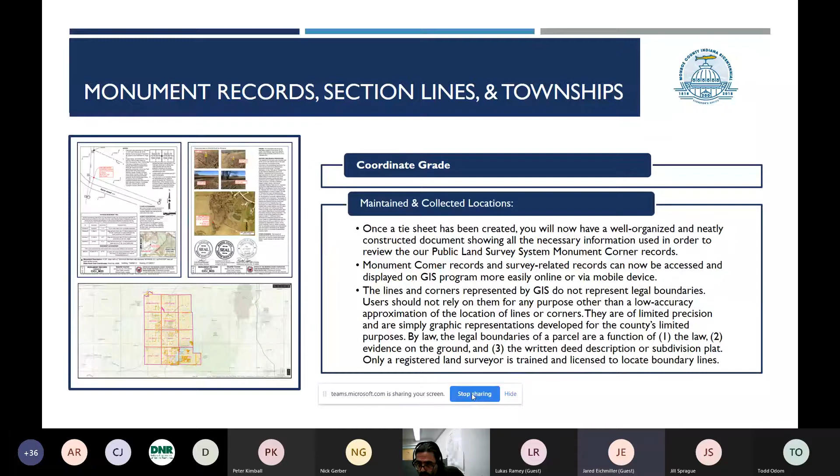Okay, when we begin this process, it starts with an email from planning. This is set up from OpenGov, an electronic permitting software system a lot of counties use. They alert us that a preliminary plat is being recorded. We go to the OpenGov page, and there are qualifications and agencies involved in this project.

Here's our review. We go to the attachments and download the plat. It kind of looks like this. We download it onto our machine.

Oh no. Sorry, I'm on the wrong screen. Let me shift over there. Okay, now we can see my G drive, I hope, where I download this document. Thanks, guys.

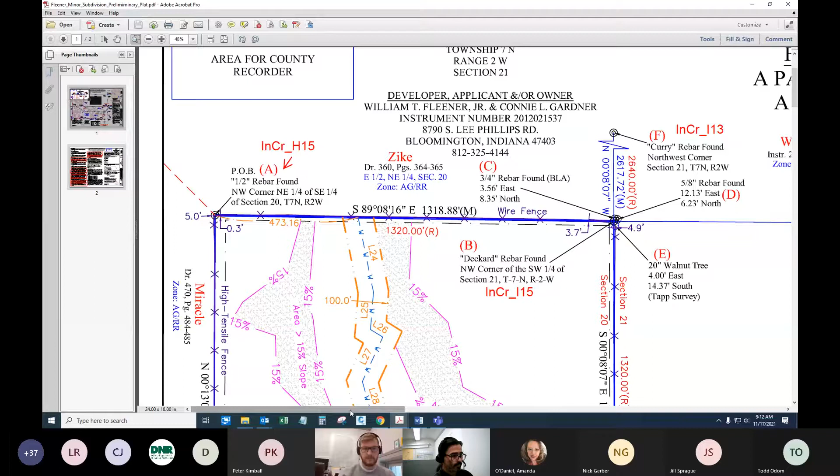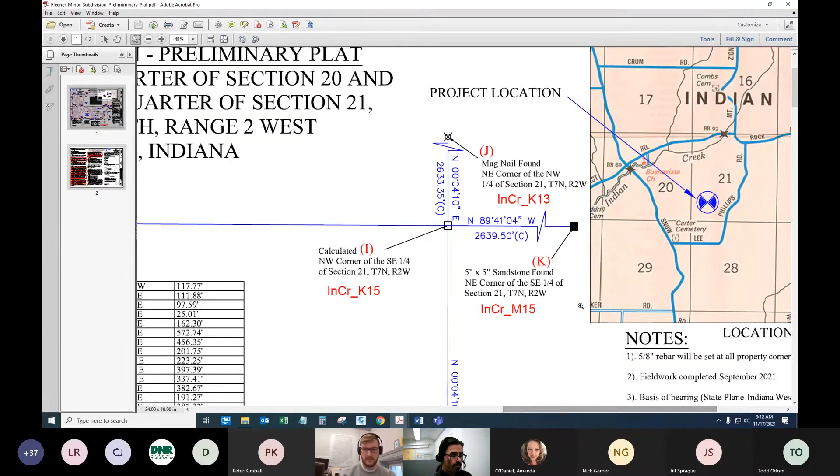If it's a stone, we make sure it's a stone in our records. If there's an inconsistency, we flag it. Here are some we're going to look at later. This is a good looking plat.

So another part of our process is to fill out a checklist. Now it looks like this. It has some basic information: the survey company, the planner, the name, the planning ID number, the name of the plat, when it came into our office, and when we approved it.

There were some simple questions. This one was consistent with all our records. If there's a discrepancy -- say the surveyor found a railroad spike instead of a piece of rebar at a corner -- we check that as a discrepancy and write it up down here. Or if it's just a replat of an existing subdivision with no section corner monument information, we just check non-applicable, save this, and upload it to the planning department. Our part of the OpenGov process is over.

However, we are going to continue to archive this stuff in our geodatabases, and Jared will speak more about that. So whenever we look at this form, this is where GIS starts to take us to the next step. It's a different way of thinking.

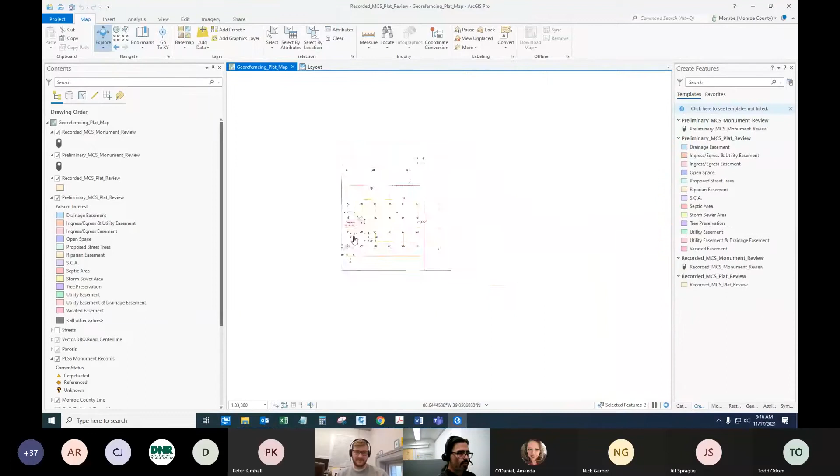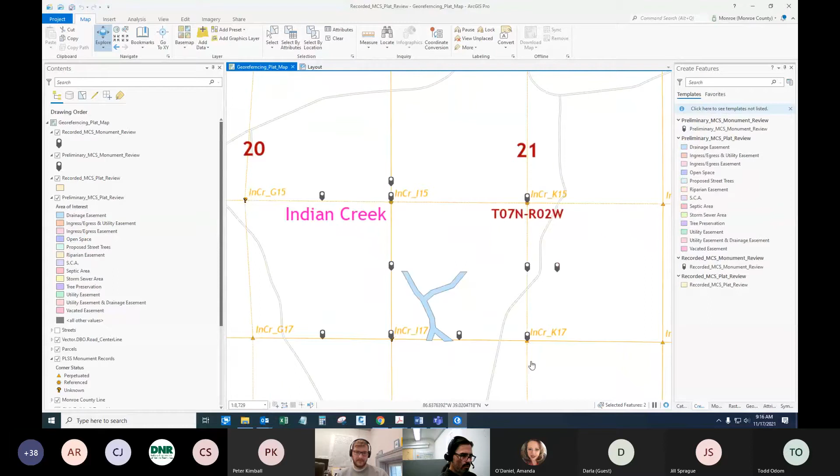See, I'm not quite there. Okay, so I kind of prepped this one. This is our county. We've got all these townships here, some little township nublins on the top and the side. This plat is going to be in Indian Creek, so I zoomed into the area since I'm familiar with it.

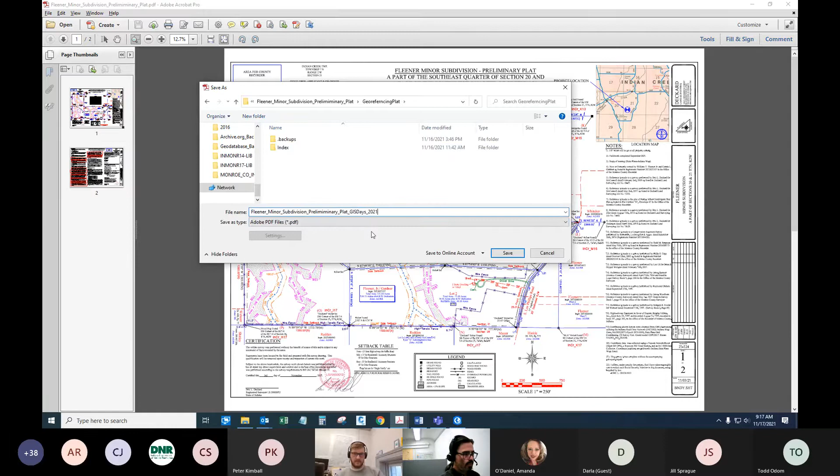I'm going to go to our folder. This is a preliminary plat. In order for this to be georeferenced, we can't do it as a PDF, so we're going to save this down as a TIFF in the georeferencing folder, with a new name with the GIS days tag on it, and change that to a TIFF.

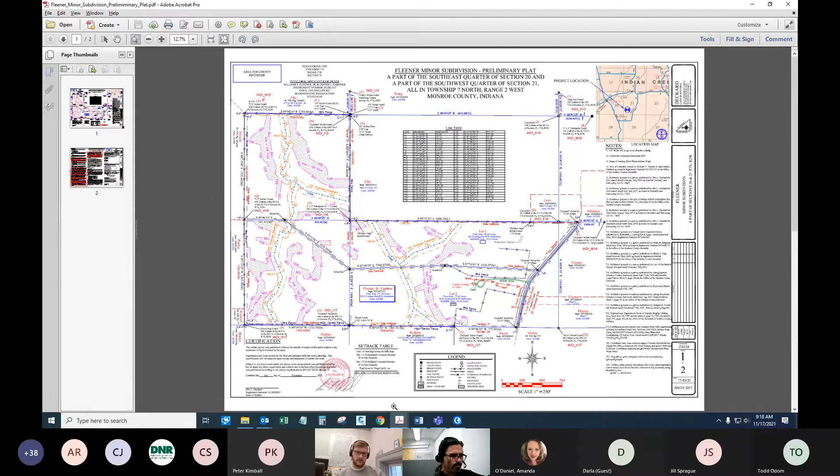TIFFs are nice, high quality, but you still have a lot of flexibility with them. A tip is it's nice to have color in there, because if you georeference something that's just black and white, it looks really weird.

This one copied the second page of the plat as well, but we only really need the drawing section, so I'm going to delete that. Rename that - like Jared spoke of, it's important for all these files to have the same naming conventions so they can all be pathed consistently. Okay, so we got a TIFF there.

We're going to go back to our software and bring this in. A lot of people just drag in these TIFFs from their Windows folder, but a lot of the GIS experts I've worked with have said it's best to bring it in from your catalog. I haven't really gotten a great explanation why, but I do it because of these superstitions I've developed over time - I just bring it in from my catalog, knock on my desk 3 times, and it usually works.

Find our folder here. There's our GIS days. Okay, and then we bring it in. I like to put it underneath the parcels layer. Over here you can see all the layers we're gonna explore.

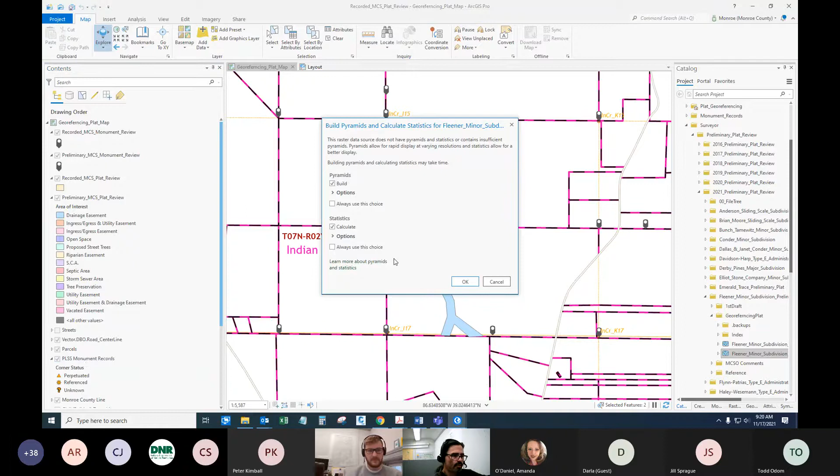It's digesting it right now. It's gonna ask me if I want to build a pyramid. And you do, but you don't want to hit always, because you don't want to get locked into that. Again, that was expert GIS advice, and I'm figuring it out.

Okay, so that means our TIFF is right there. There should be a little box here - it says unknown coordinate system because we have not referenced this yet spatially. We go to appearance, and we want to set the stretch type to none. For whatever reason, if you don't do that, it just shows up as a blank square.

Okay, then we go to imagery, georeference. You want to fit this to display. Oh, it worked. Great.

Okay, now we're going to add some control points. These lock this plat in. You can start to see the shape of it versus the parcels, and... Pepto-Bismol magenta. There's our plat in blue. These surveyors use lots of color - I like that.

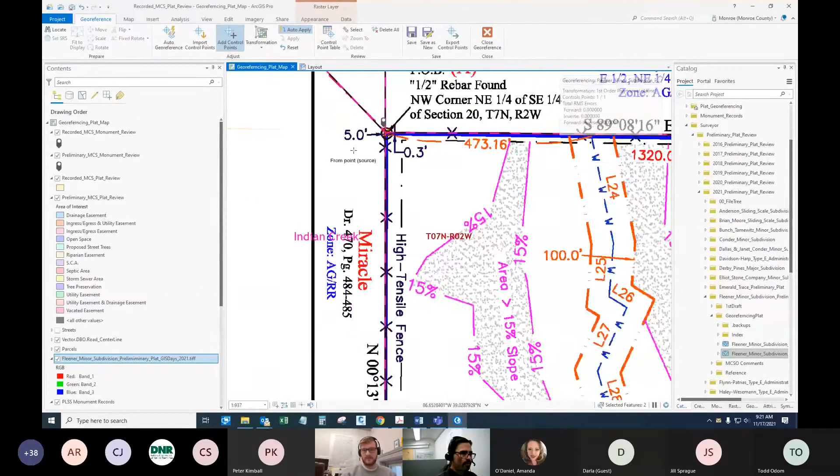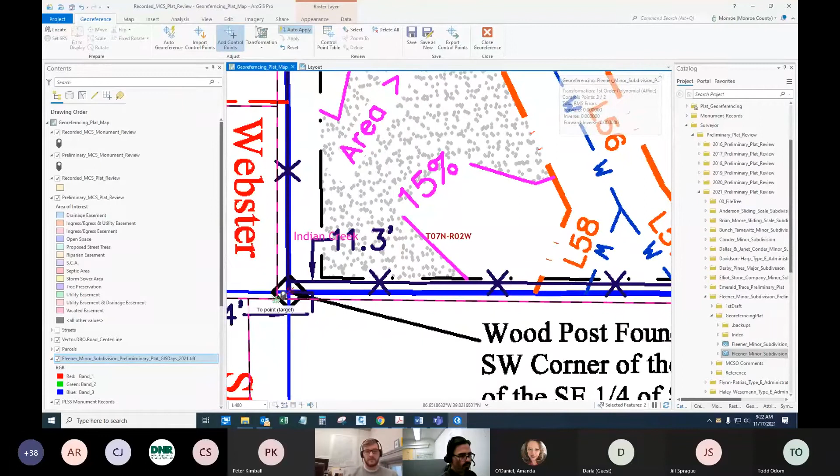So you just click on it and you see that little red circle - you create your first control point. You just go around and lock it into the thing, and it kind of shifts it around. Like we said in the intro, none of this stuff is survey grade. Once we put it in there and start stretching things, it becomes compromised and loses its scaling. But it's a representation of what's going on in this area, and that's an important issue to our planning department. We're going to start sharing this information more with them and other agencies as we go along and get this further developed.

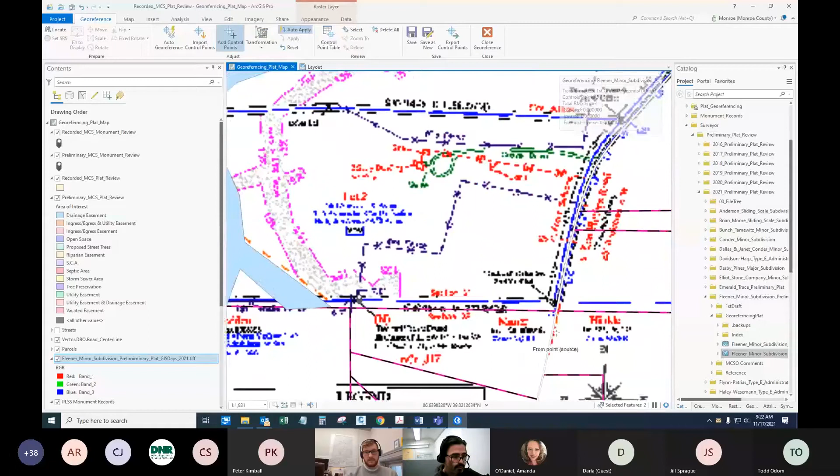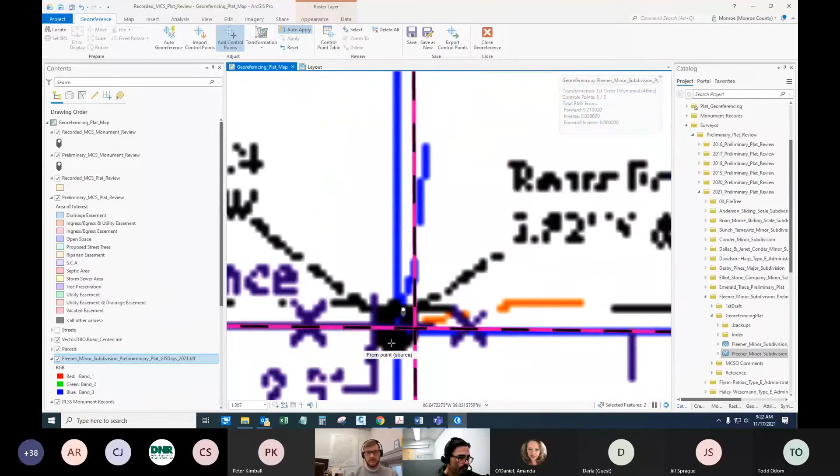Like in a lot of counties where these parcels have been around for generations, they're not perfectly shaped, and really the survey is probably a better representation of what these parcels should look like. They may get modified in time. So you just lock it in - you really don't need to go overboard. If you do it too much, it kind of really makes it oblong.

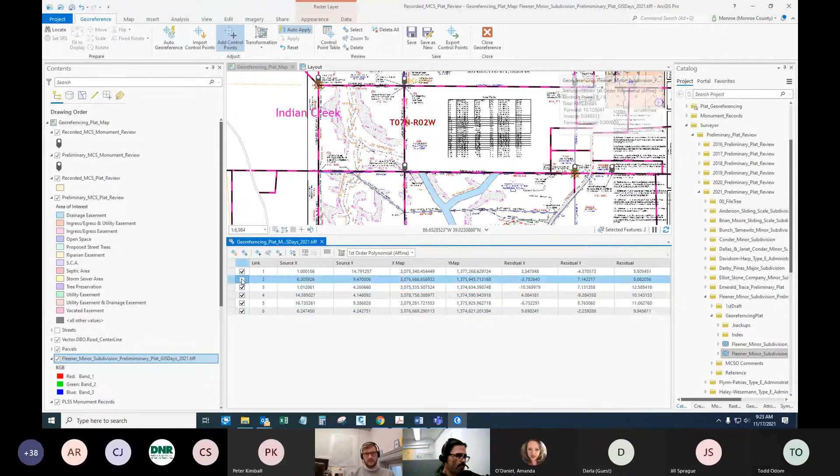Okay, so we got some control points there. If you want to look at your control point table, you can delete a point you don't like that shifted things in a way you don't think it should have gone. You can review that, delete a line - it's pretty handy. But once you've got things where you like them, you just save your georeferencing, and this TIFF is locked in here. And you close your georeference.

Okay, so next item we're going to demo here is we're going to show - this plat had 13 section corners on it, so I did most of them already, so as not to drag it on. These are two I left for the demo: a mag nail found at this northeast corner.

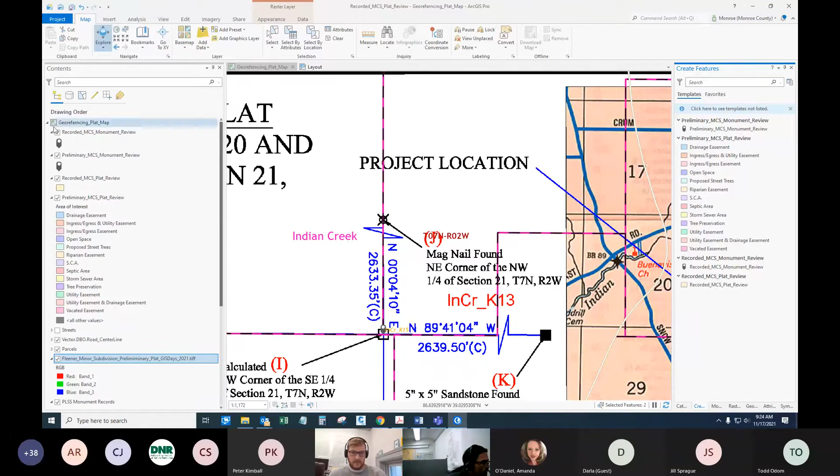So we developed this system to track these monuments. Got a little file tab here. You may know there's a break line here, right here. So this isn't actually where this section corner should go, but the important part is the data that we're going to use to identify this corner in our geodatabases. There'll be several instances of it as time goes on and more plats are generated in surveys, so we can check for consistency of all references to this section corner, Indian Creek K13.

Okay, so I've got the monument in place. I'm going to open the attribute table now, where we can see - there's other ways to do this as well. This is kind of my learning curve way of learning how to fill these tables. Where are we at? Monument.

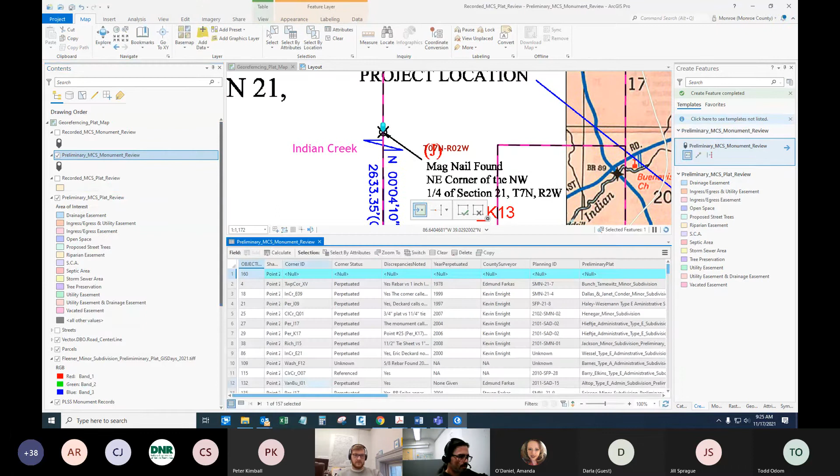That black box is the attribute table. I like to dock these up here so I can switch from map view to attribute. I sort ascending because this will be the last one in here. Go down to the bottom. What do we call it? Indian Creek K13. And we begin filling out our table.

If anybody sees a typo, just tell me.

So we check whether the monument is perpetuated or not, if it is referenced in surveys, or if it is unknown. This one is perpetuated, so we put that in here. There are no discrepancies.

I happened to research all this stuff ahead of time. This was perpetuated in 2011 by the then surveyor, Mr. Kevin Enright. These are the other fields I filled out before, so I'm just going to copy this information in from them. In time, we're working on ways to append this so we can just fill these fields automatically once we have the general planning number. But we just started this project as soon as I got here, so it's in its infancy right now. That was - the survey said that was a mag nail.

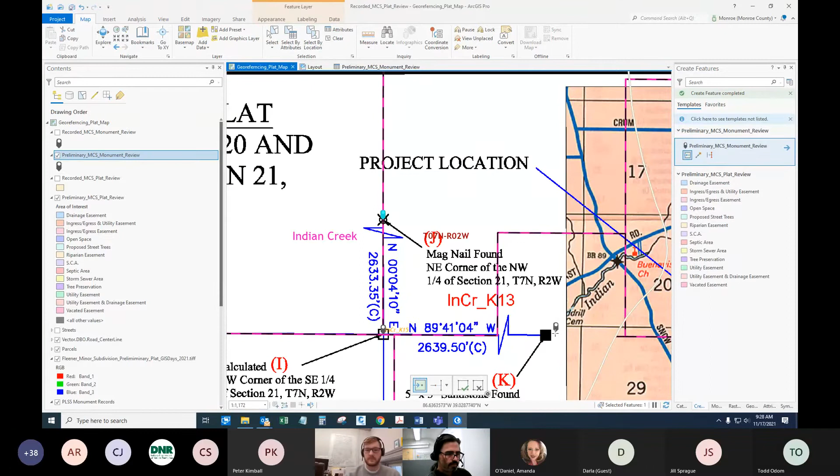Okay, we're gonna go right to our area of interest. And that's what we call these features here. These are things that planning is interested in: drainage easements, ingress, egress, open spaces, conservatory features. Stormwater is a big issue here. So a lot of these things were coming into play and probably become more into play as planning becomes more developed.

Okay, so I've identified a drainage easement up here. The best way to draw this out is with the polygon tool. You just kind of draw along there. I was terrible at this, but now it's pretty fun and something I look forward to doing.

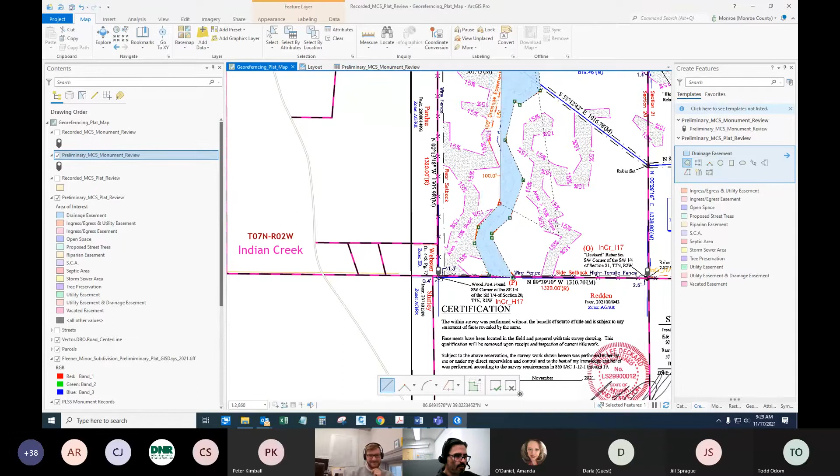It's like a reprieve to childhood days where you're coloring in school or something, like waiting before the teacher's ready to get going for the daily lessons. It doesn't have to be perfect because, you know, this water's not really going to go exactly along this pathway either.

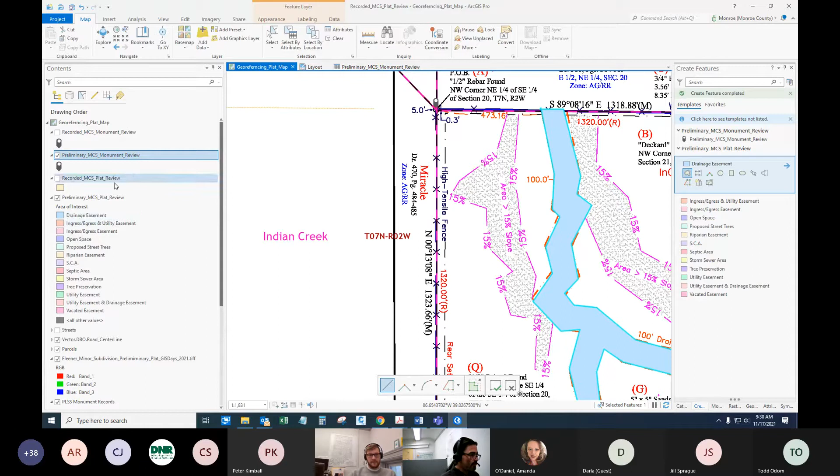So once you get it finished, you could just right click and hit finish, or hit F2. And that should load it into the attribute table for that feature. There it is, null. So we just filled our table. So drainage easement, that was already pre-identified.

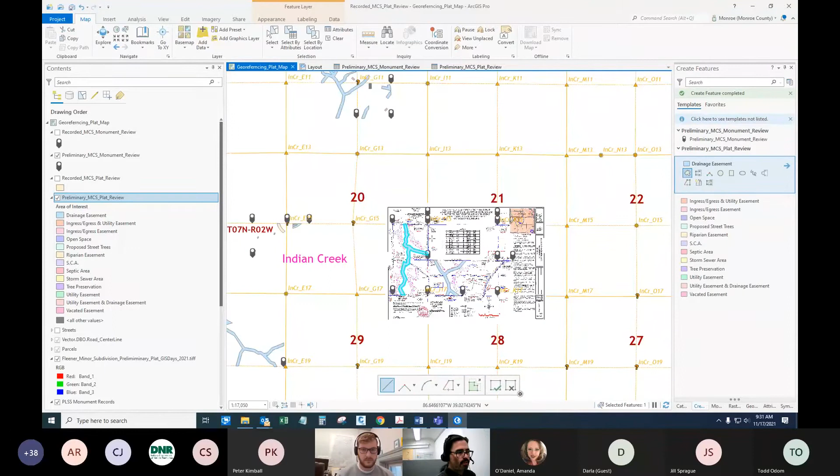And it's always good to save. I'm not going to save here because I'm probably going to doctor these a little bit. I believe there was one more - there was one I did yesterday. It's really cool - once you get some scope with this stuff, you can zoom out the whole county and just see other features you already added in there.

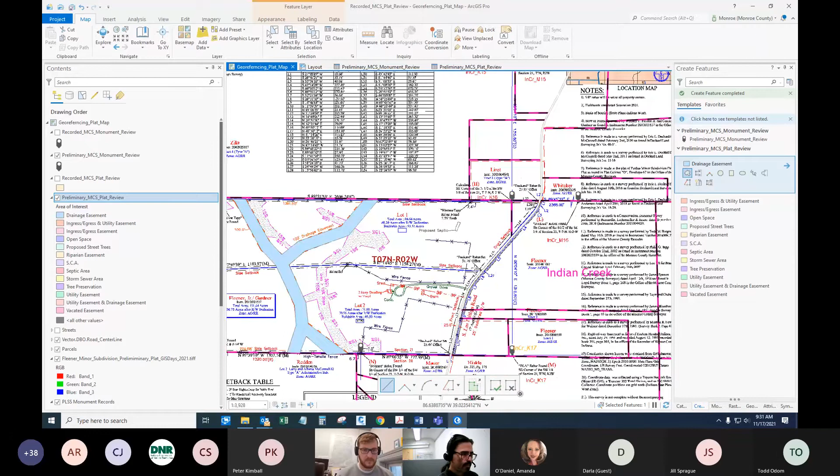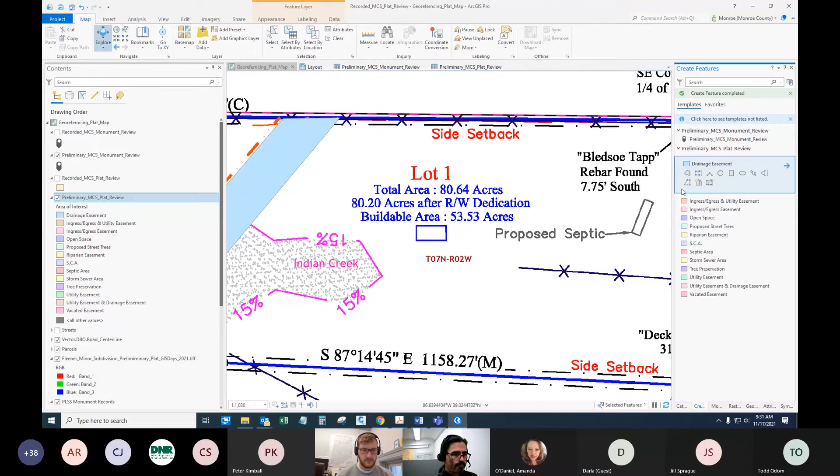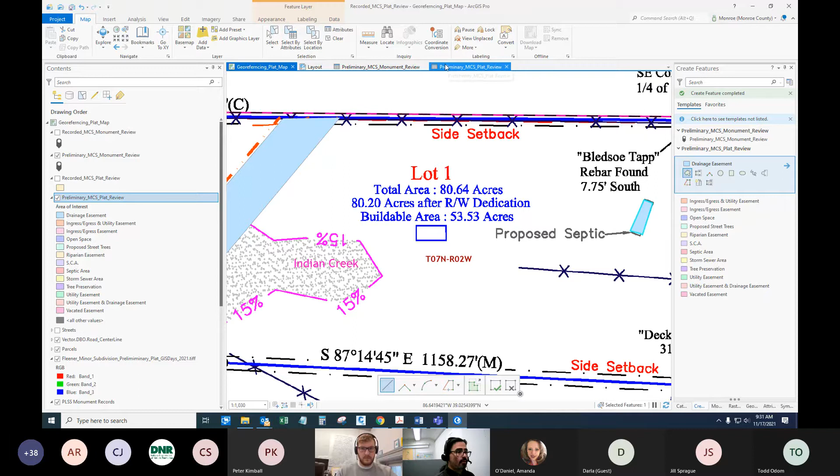I'm going to put one more in here. This is a - nope, it's right over here. It's a proposed septic. And likewise, go to your attribute table. There it is. Oops, I identified it as a drainage easement. No problem.

Okay, and you save it down. And that is how we have been documenting areas of interest and monument corners in Monroe County.

Jared would like to talk more about this data utilization. Thanks, Jason. Amanda, about how much time do we have left?

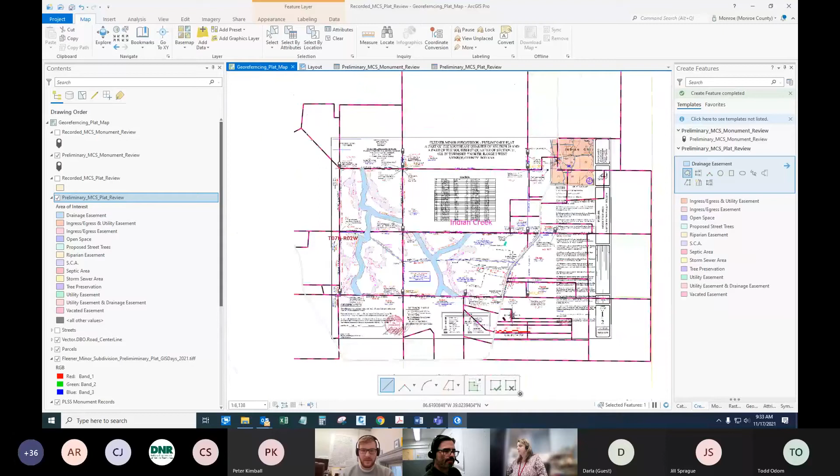Okay. Okay. All right. Well, I will jump into this. Thanks, Jason. I will go ahead and start sharing my screen. And Amanda, I can't hear you.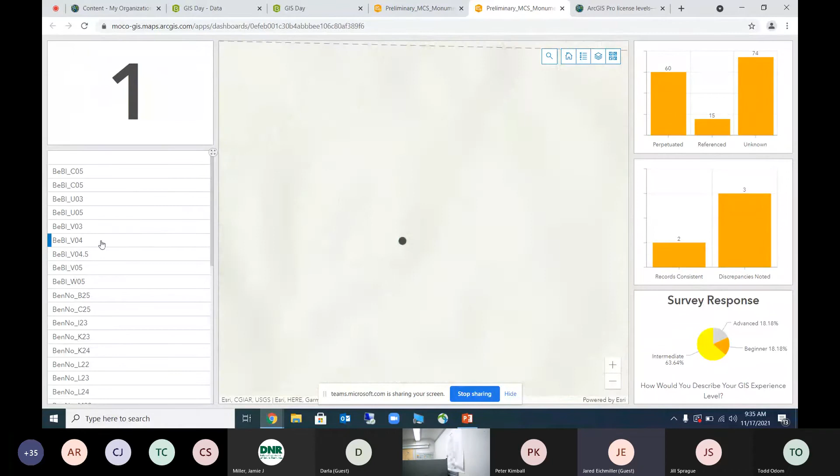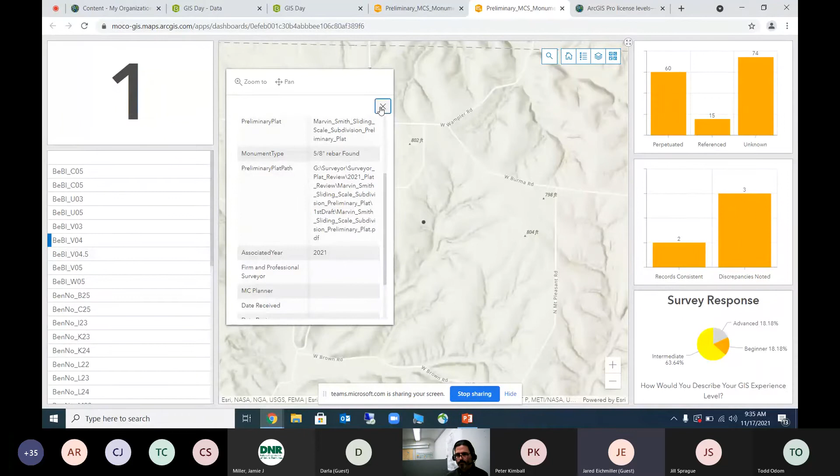If we take a look at this, we can come down and see the attributes associated with this specific monument. A lot of this, as a GIS coordinator, is about making this possible for a project of this extent to be used by users at an appropriate level. In our current process, users can do all of this work, but they can also use a custom geoprocessing tool that does the file pathing for them to the universal naming convention, which gives them the ability to still engage in this process.

So with these clusters, we can see for this monument record there is 1 associated with it. This tool allows us to see how many there are. This is a dashboard that was pulled together quickly, specifically for this presentation, but we can see here the associated records for the specific monument. We're able to take a look at some of the ongoing changes to these records, specifically looking at instances where multiple discrepancies have been noted over time, which would be extremely useful to the departments involved.

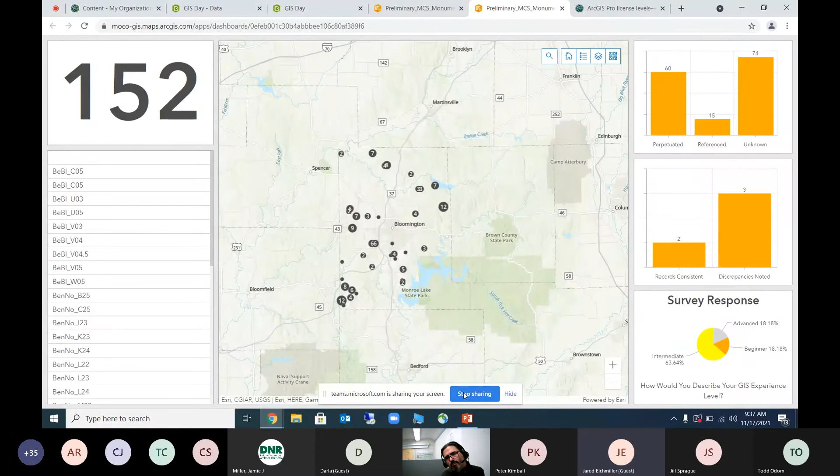So with that, I think we are ready to answer some questions that people might have.

This is Amanda. Can you hear me this time? I can. Oh my gosh, I got out and got back in. Nothing like you running this whole event and it not working.

Okay, we have a couple questions. Jill asked, which license level gives you the georeferencing capabilities? Jason currently uses a basic license level on a named user account, and he was able to accomplish all of that with that level.

Great, another question from Jill: have you considered requesting CAD files or spatially referencing PDFs from the surveyor and the engineering firm? Electronic submittals are of course something that we always benefit from, and I think that's part of a broader discussion and process.

One more question from John Howe: what's the conflict resolution process for times when the survey corner reference does not match what's on file for that corner in the surveyor's office?

Jason, are you able to respond to that one? Yes, really we just note the discrepancy. We reach out to the surveyor. Perhaps some information has changed since we were last out at the corner, and our tie records are outdated. We put this in our queue to do field work and catch up if the surveyor has good cause. Sometimes it's just a typo. Sometimes the surveyor is right, but we're not. We don't dispute what the surveyor says.